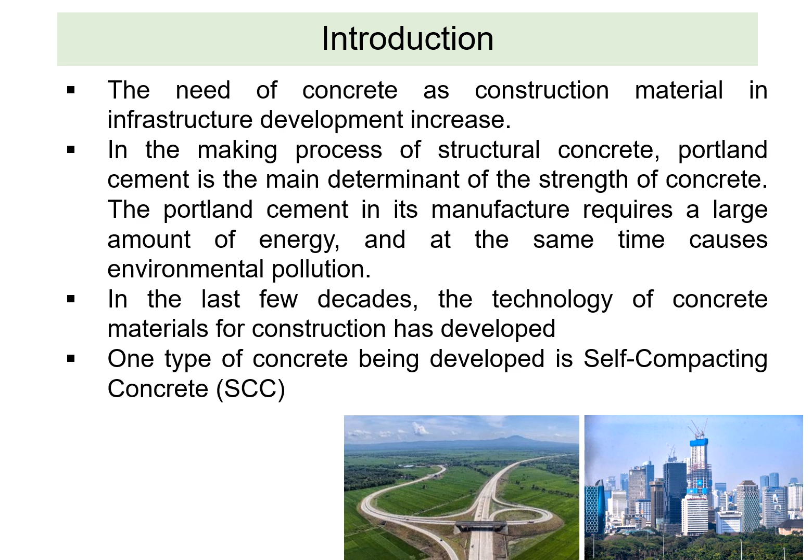One type of concrete being developed is self-compacting concrete, SCC. Self-compacting concrete was first developed in Japan around 1988. The main characteristic of SCC is its ability to flow and fill the mold and pass through the reinforcement independently without the intervention of external energy. This kind of property is possible because of the moderate viscosity, which is determined from the proportion of the mixture with a higher content of small particles compared to normal concrete.

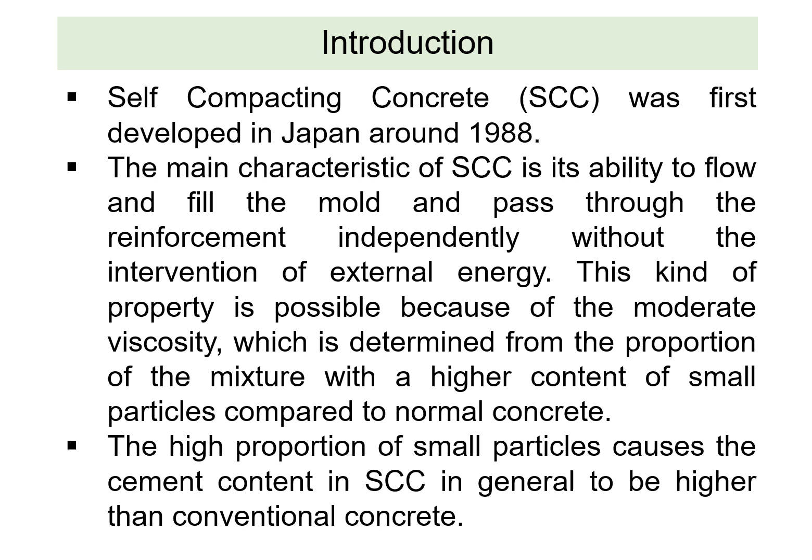The high proportion of small particles causes the cement content in SCC in general to be higher than conventional concrete. In the manufacture of 1 kilogram of cement, the amount of CO2 emissions is equivalent to 0.9 kilograms. A practical step to maintain environmentally friendly concrete manufacturing is to reduce the amount of cement used. One method to reduce the use of cement is to replace some of the Portland cement with fly ash. The cement replacement with high amounts of fly ash has been carried out for a long time, even at replacement levels of more than 50%, known as high-volume fly ash concrete, HVFAC.

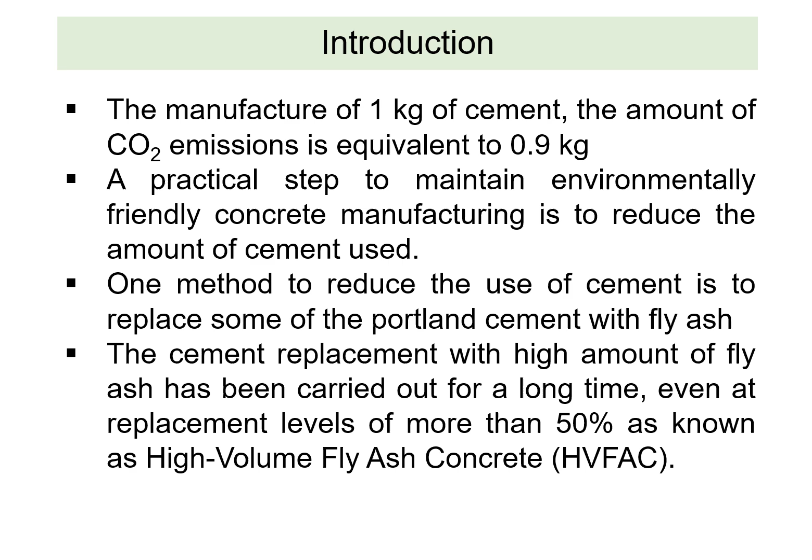Research aim. 1. Analyze the costs and emissions of normal concrete and HVFA-SCC. 2. Compare the costs and emissions of normal concrete and HVFA-SCC. This study will provide a comprehensive overview of the potential cost savings, carbon emission reduction contributions, and the feasibility of implementing HVFA-SCC in construction projects, particularly in developing countries like Indonesia, which has abundant fly ash supplies.

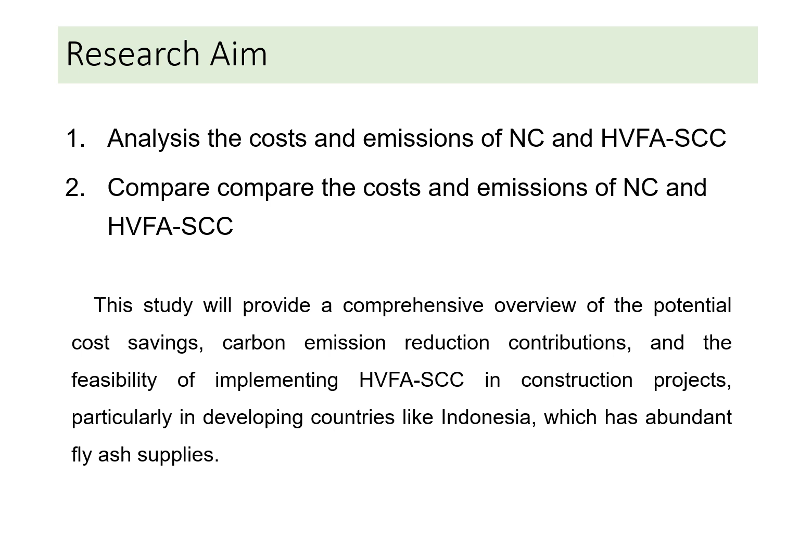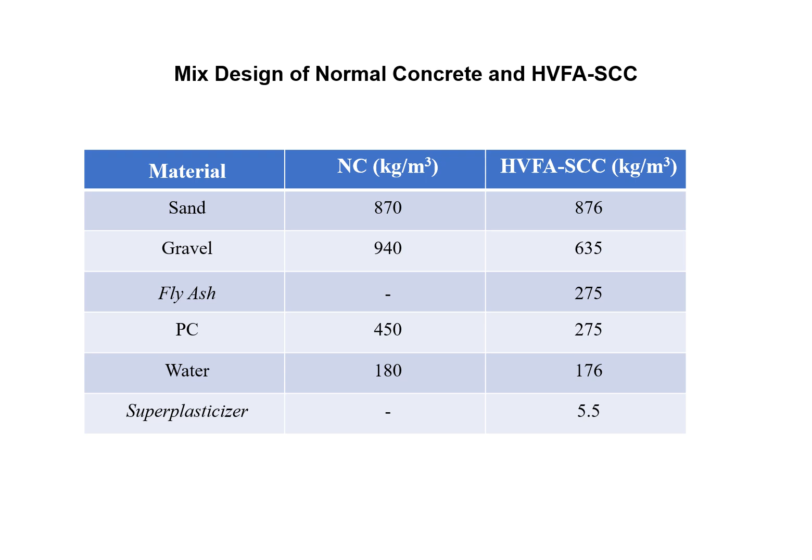Mix design of normal concrete and HVFA-SCC. For NC: sand 870 kg per cubic meter, gravel 940 kg per cubic meter, cement 450 kg per cubic meter, and water 180 kg per cubic meter. For HVFA-SCC: sand 876 kg per cubic meter, gravel 635 kg per cubic meter, cement 275 kg per cubic meter, fly ash 275 kg per cubic meter, water 176 kg per cubic meter, and superplasticizer 5.5 kg per cubic meter.

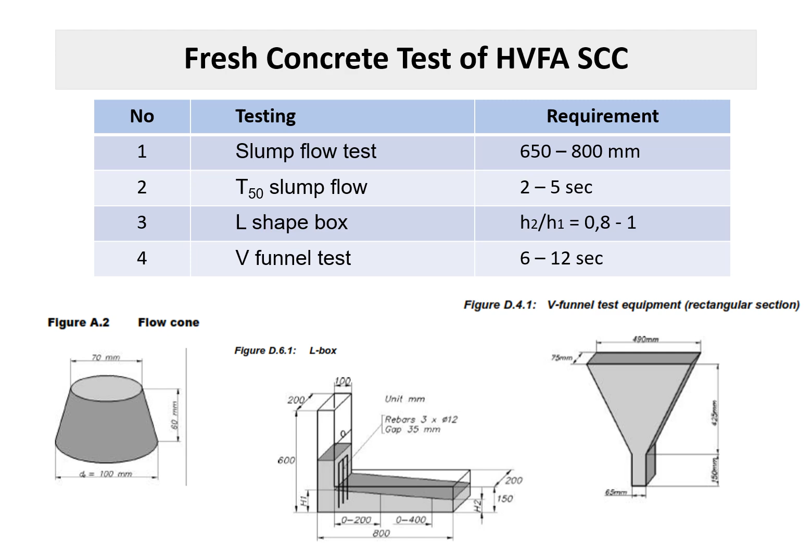Fresh concrete test of HVFA-SCC according to EFNARC 2005. Slump flow test, the requirement 650 to 800 mm; T50 slump flow, the requirement 2 to 5 seconds. L-shape box test, the requirement H2/H1 equals 0.8 to 1. V-funnel test, the requirement 6 to 12 seconds. Fresh concrete test results: slump flow test 670 mm, T50 slump flow 4.65 second. L-shape box test 0.86. V-funnel test 9.1 seconds. All HVFA-SCC tests fulfill the requirements.

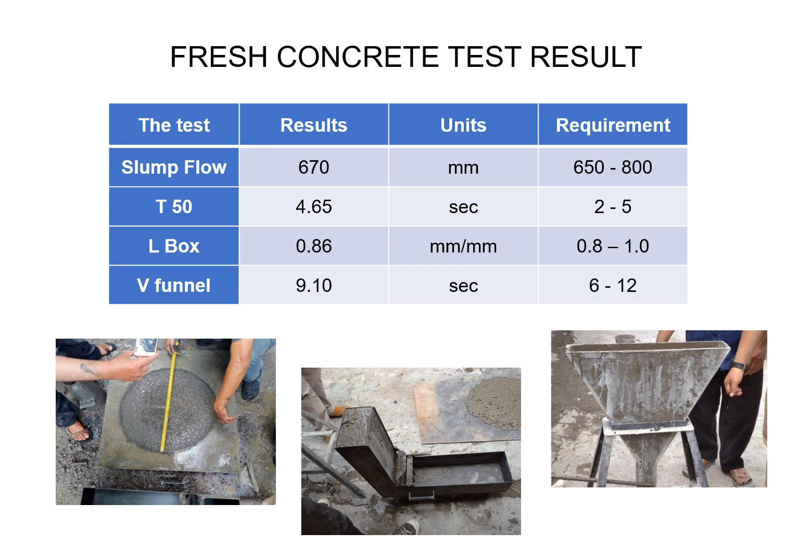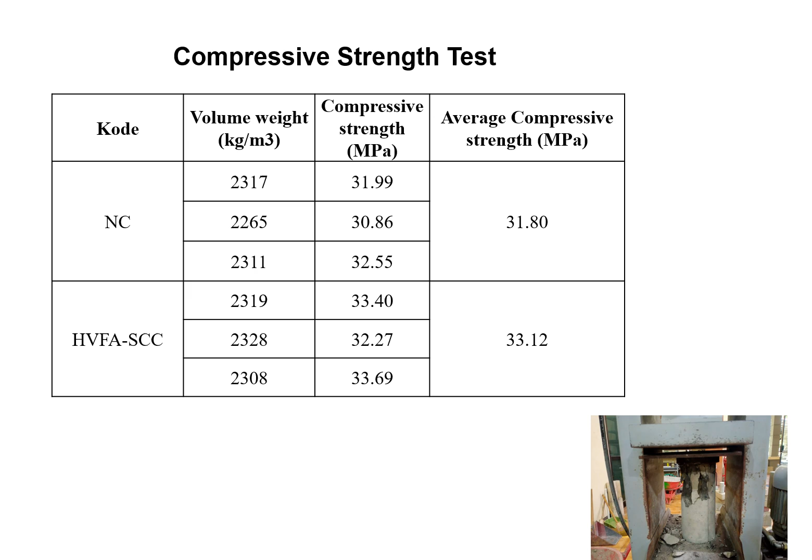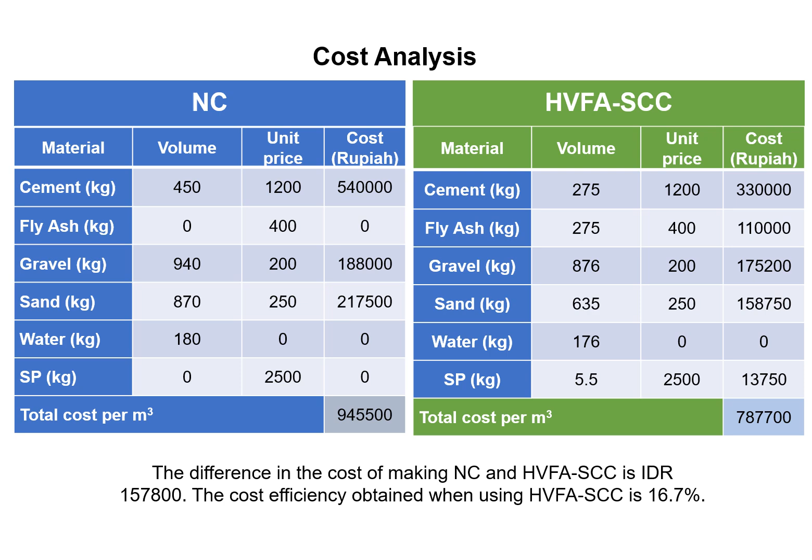Cost analysis. Cost analysis was conducted to determine the manufacturing cost per cubic meter of concrete, both for normal concrete, NC, and HVFA-SCC. The total concrete cost was calculated by multiplying the quantity of material with the unit price of each material per cubic meter. From the two tables it can be seen that to make 1 cubic meter of NC requires a cost of IDR 945,500, while HVFA-SCC per cubic meter requires a cost of IDR 787,700. The difference in the cost of making NC and HVFA-SCC is IDR 157,800. The cost efficiency obtained when using HVFA-SCC is 16.7%.

Emissions analysis. Emission analysis was conducted to determine the amount of CO2 emissions produced in concrete production per cubic meter. The total emissions were calculated by multiplying the quantity of material with the emission factor of each material per cubic meter. The emission factor used data from research in 2020. The CO2 emissions produced in normal concrete, NC, are 446.078 kg CO2 per cubic meter, while in HVFA-SCC it is 283.766 kg CO2 per cubic meter. The difference in emissions produced by the two types of concrete is 162.312 kg per cubic meter. Furthermore, it can be concluded that implementing HVFA-SCC will reduce CO2 emissions by 36.39%.

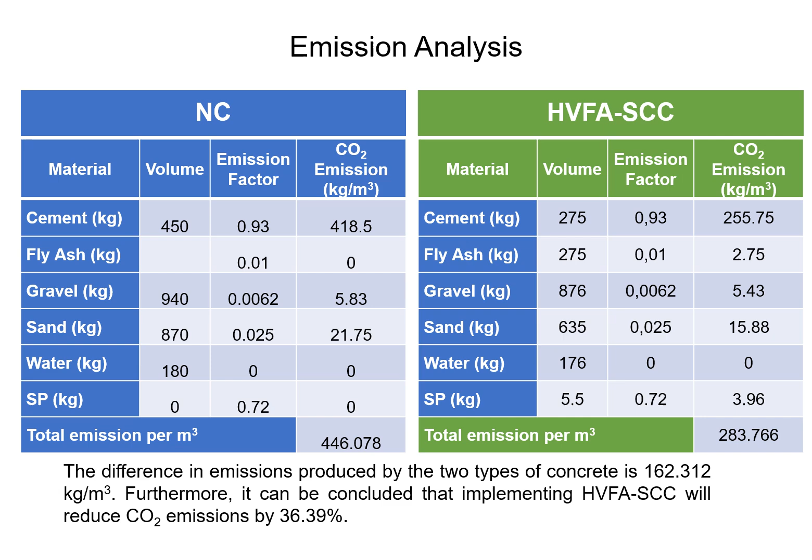Conclusions. 1. HVFA-SCC can achieve compressive strength equivalent to NC, so it can be applied to structural work. Fresh concrete testing also shows that HVFA-SCC meets the requirements of self-compacting concrete. 2. HVFA-SCC provides significant cost savings. Substituting 50% of cement with fly ash in the HVFA-SCC mixture results in a reduction in material costs of around 16.7% or IDR 157,800 per m3. These savings mainly come from reducing the use of cement, the most expensive component of concrete mixes, as well as from reducing the need for superplasticizers.

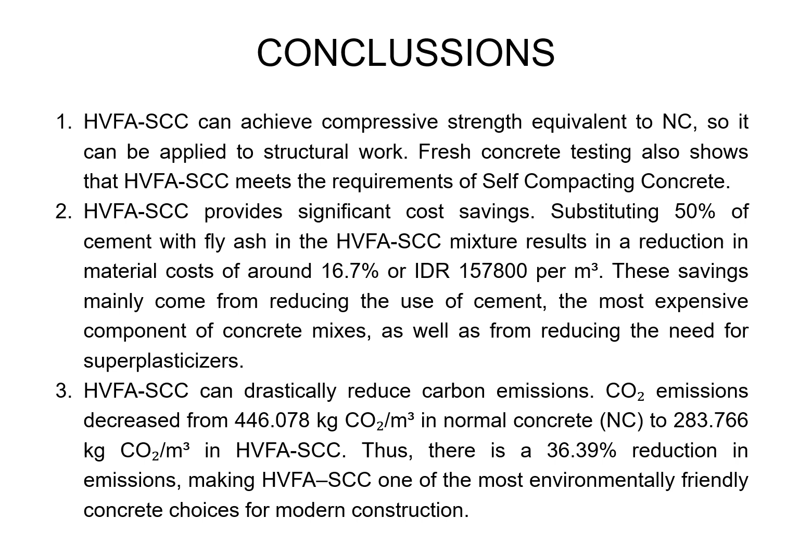3. HVFA-SCC can drastically reduce carbon emissions. There is a 36.39% reduction in emissions, making HVFA-SCC one of the most environmentally friendly concrete choices for modern construction.